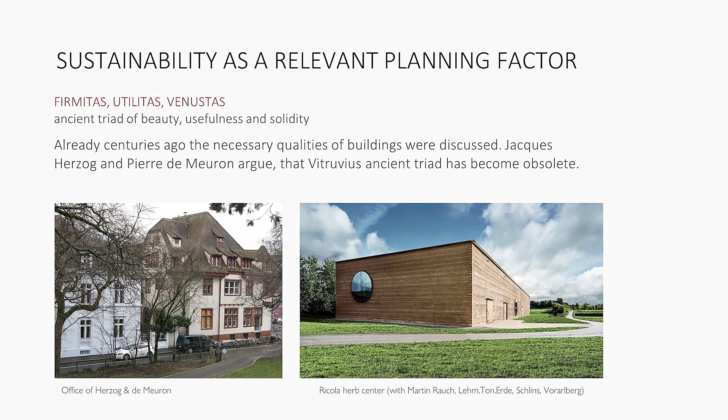Already the Romans discussed the quality of buildings. Vitruvius defined that the triad of beauty, usefulness, and solidity was what defined the quality of buildings. Though they regard it as no more attractive, Herzog and de Meuron admit that firmitas could still play a quite interesting role in modern architecture because it challenges the view on architecture in general. What is a wall? What is a floor?

Here the research of building traditions can help. Herzog and de Meuron researched a lot on old building structures, and they found in the end that beauty enchants us, that beauty makes us curious about ourselves and about life, and stimulates us. Do more, create a biophilic world.

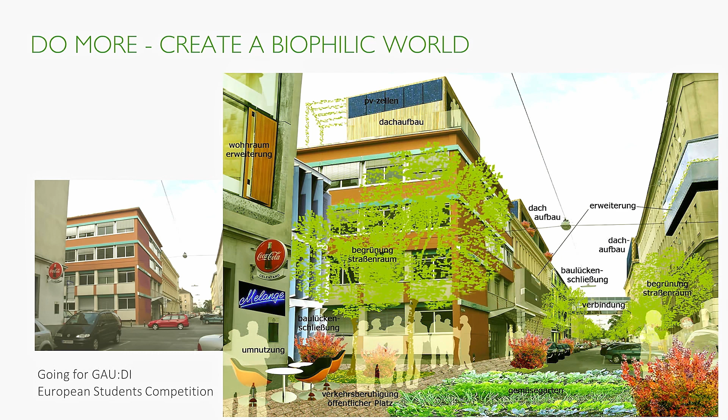We see here that sustainability does not only play a role for individual structures, but also for street life. So it is interesting to also regard these aspects that play a very important role in social contexts.

There's architect Wolfgang Frey, who has set up five principles of biophilic design. He says that ecology, the regard of materials according to their natural properties; economy, affordable planning structures; innovative design; society, integrative places to meet; and sensitive systems that motivate us for new attempts, are the basis for sustainable design.

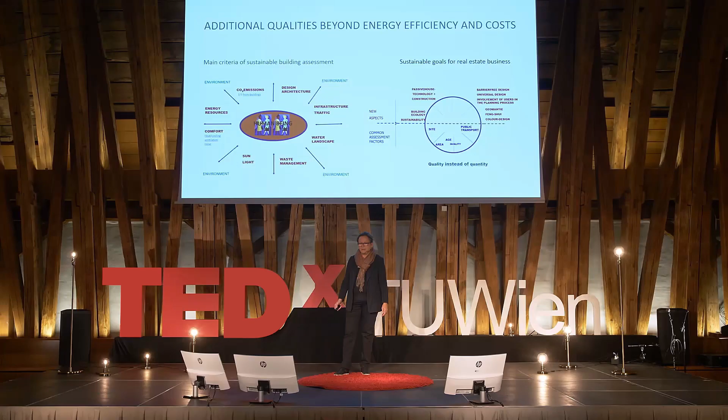When assessing the grade of sustainability of buildings, additional qualities should be taken into account, like comfort and, for instance, design for all, and even feng shui, as shown in these graphs.

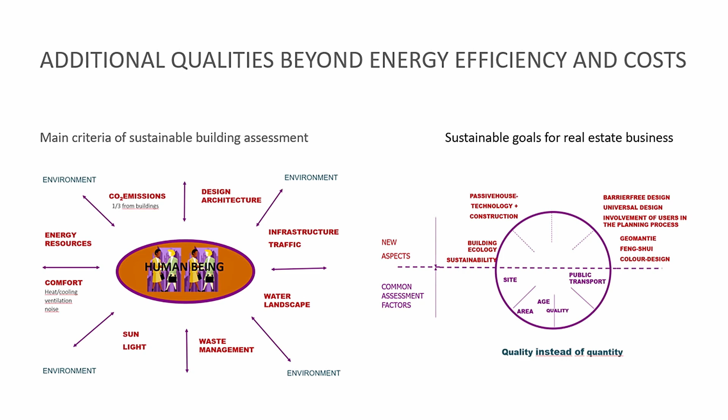Architecture has a big contribution to social stability. Therefore, sustainable planning measures should be promoted, like the Austrian State Award does, or the Swiss Solar Prize, and the Norman Foster Plus Energy Building Prize, which focuses on the integration of PV in the building envelope.

Imagine that you were given a piece of land and you have enough money to build a house. What would you do? How would you build it? If you were an artist, a businessman, an investor, or a father or mother of a newborn child, would you build it like your grandfather? Would you build it like a picture in a magazine? Or would you build it elegantly and impressively, or natural and ecologic?

Would you make it from bricks, concrete, or mud? Alone, or together with friends? And would you use high-tech or low-tech technologies? Well, this depends also much on the place that you have. It is different if it is in the heart of Europe with a moderate climate and solid growth, or if it is in a hot climate in a rapidly growing community, like for instance in Mali.

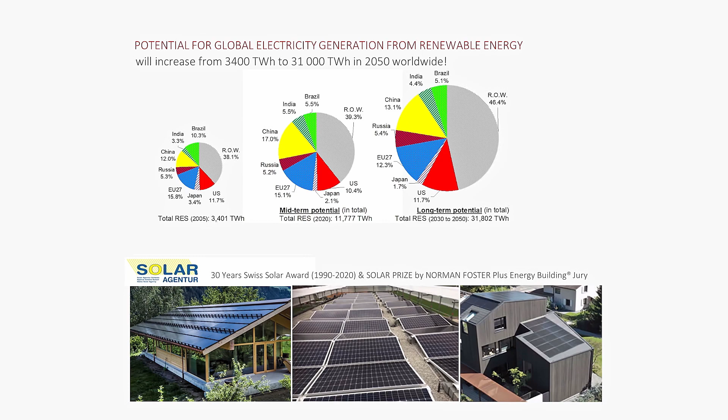Just one slide to show the opportunities of solar power: 31,000 terawatt hours until 2050 more should be enough for a change. It is much more than we actually have from atomic power. Below, you can see the beauty of PV roofs awarded by the Swiss Norman Foster Award. So there's no barrier for using them.

But for the work with students and also for own projects, I set up a catalog of even more new requirements for sustainability, and I would like to highlight some of them. Most important for me, because it's very new and we like to use it very much, is the development of a new vision for the community and its position in the region.

A big picture deriving from regional planning, but very useful. And density, very often discussed: how the new settlements and cities should be dense to spare ground and sites. So the density should be tailor-made for the size of the place, for the size of the buildings of a place. Gardening and food production, very important as an additional source in the built environment.

Planning guidelines from energy-conscious construction: they are everywhere different because the boundary conditions are everywhere different. Regional building materials and crafts, this is new.

They should not be transported and brought from far away, using a combination of massive support constructions and fill-in elements from renewable materials. Social considerations play a very important role. Watching the elections at the moment, we see that it's very important to find connecting solutions.

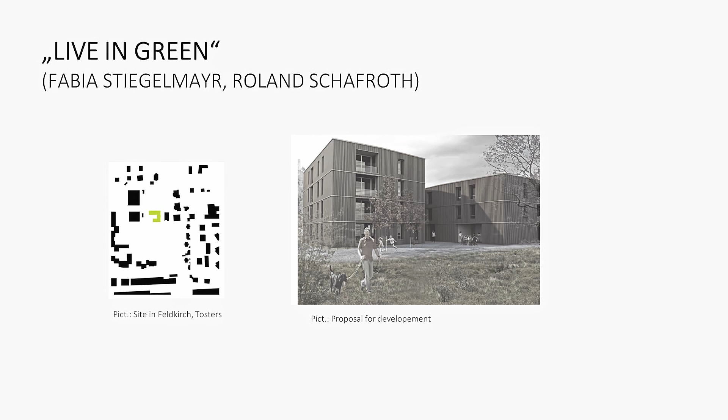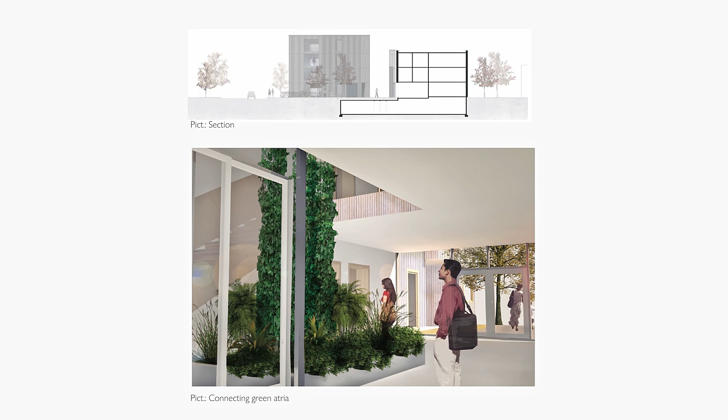Also in the interior there was green integrated into the design, which is always very, very attractive. Another project done for immigrants and for the use of empty spaces and buildings in the center of towns.

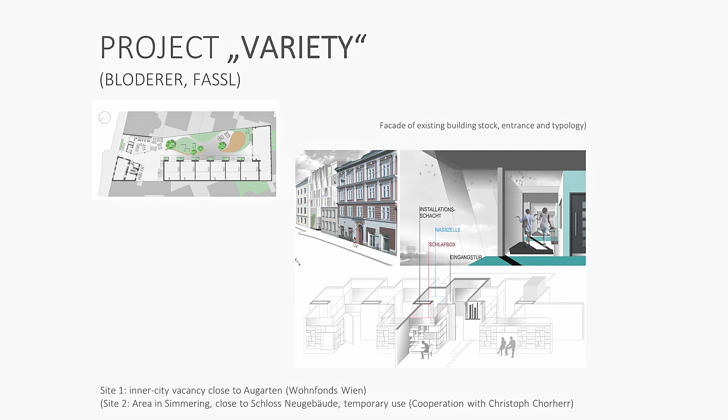This project shows how a small gap and a small site can be used in a dense area to offer a good life there. The old building offered an exceptional height of the rooms, and so three-dimensional structures could be introduced, very charming and very well suiting for young people.

This was a project for new neighborhoods on the Nordbahnhof area. A new living concept should be developed with innovative technologies and connected to DIY construction. In the end, it should be a livable and animated neighborhood.

This is the plan that formed the basis of the course. It was the winning project of an urban planning competition, and it shows very well that they overtook the Viennese block structure of the town.

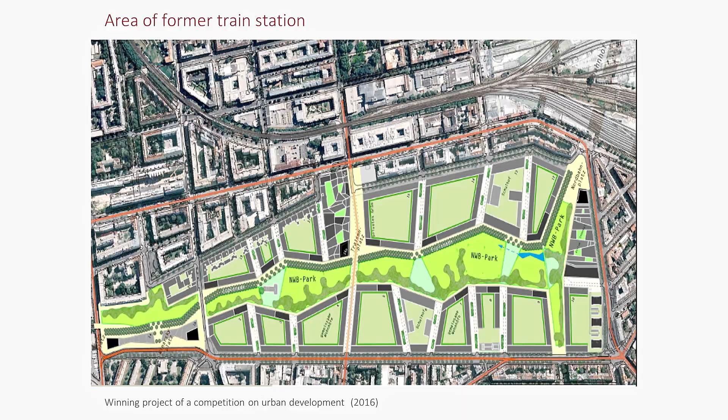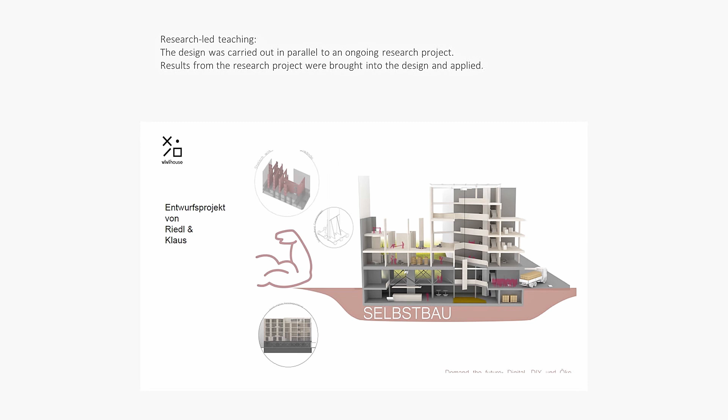This project, which I like very much, shows flexible room structures - room shelves with skeleton construction as a primary construction, with prefabricated wooden building elements as a secondary construction that can be easily changed. A concrete storage technology in the ceilings, and an energy efficient envelope combined with integrated renewable energy sources. This was also very interesting input.

Parts of the building volume were left empty to be filled in later when needed. So a very sustainable topic.

A businessman from Karlstein came to me and asked me to develop ideas not only for the site he had in Karlstein, but also to improve the life there. Karlstein is a community north of Vienna, close to the Czech border.

The following requirements were taken from our catalog to be followed by the students: the development of a vision, a big picture for the whole community; then the density chosen, tailor-made for the size of Karlstein; gardening planning guidelines were developed; regional building materials, which is also wood in that area; and specifically home offices, because many people go to Vienna for work.

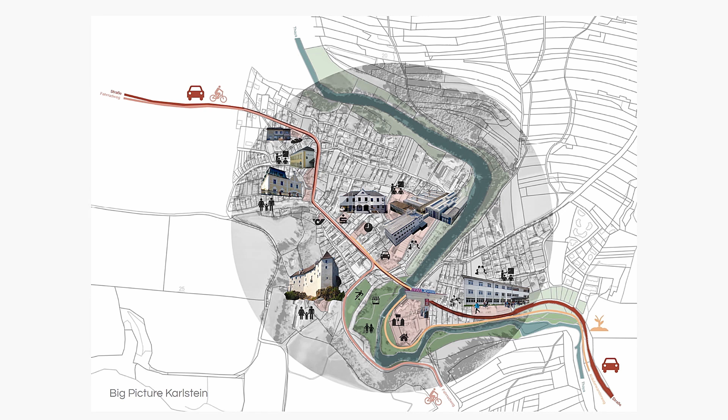This is an example of a big picture. It shows that the community should be developed into a community of short ways and cyclists. Most important, interestingly, was to change the main street into a boulevard where people can walk and meet.

Kirchberg has been a touristic destination for Viennese since long, but lost its attractivity. Also here, a vision had to be developed as a first step.

The main focus here was the recovery of the old stock, the revitalization of the old town center, to lead the discussion between living in the town center versus space consumption in the undeveloped area, and the conservation of green spaces that were available in the center.

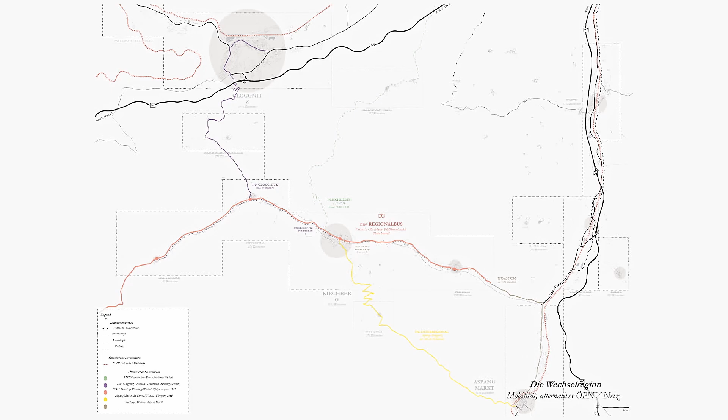This shows the position of Kirchberg in the region. Its disadvantage is that it's far away from the main traffic routes. That's how you can visualize analysis of landscape, infrastructure and mobility.

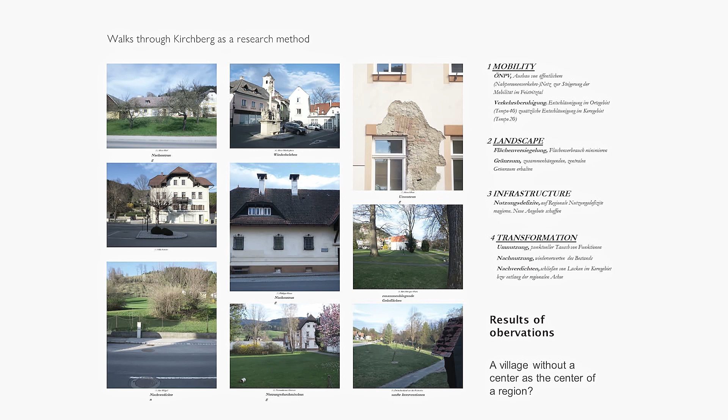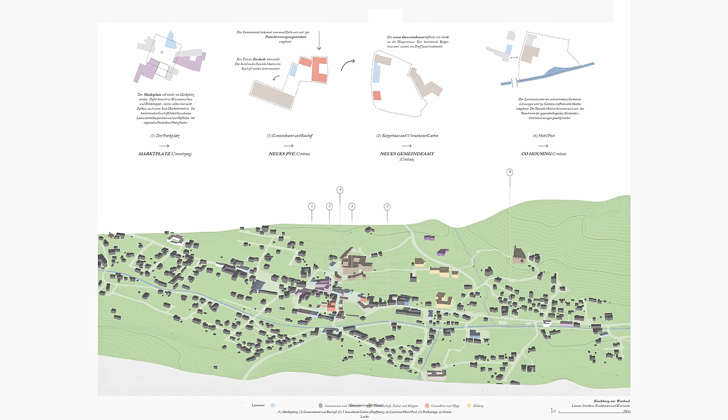Walks are a very good research method to learn the specifics of a village. Furthermore, it was important to find out which buildings and which places are important to be kept and developed in Kirchberg, and also how mobility could work if organized a different way, and to discover good meeting zones.

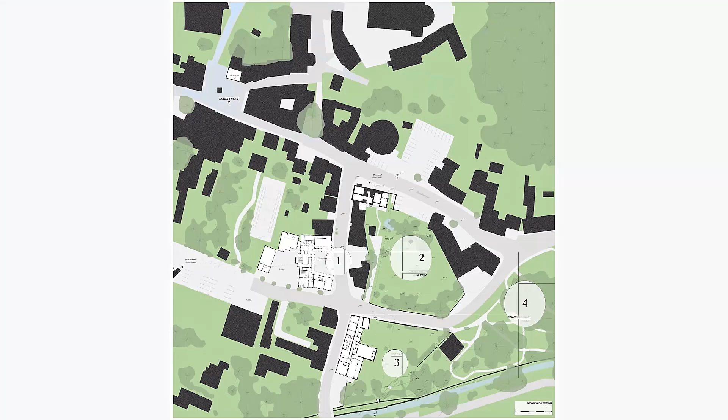This was the end. As a result, the center was reorganized, and the existing building stock was renewed and also reused, with some uses changed from one building to another. So the community was very much okay with it.

Coming to sustainable refurbishment, a very interesting example was the Otto Wagner Areal. Imagine it is younger than this beautiful hall here, much younger. So we're very happy to have this hall as a place to perform our talks.

The historic buildings of this former hospital were to be adapted for future use, which will house the Central European University, the CEU, as they move from Budapest to Vienna. Careful planning was required: which technologies are suitable for these old buildings, the integral and simultaneous use of planning tools, and strategies for mastering the complex construction tasks.

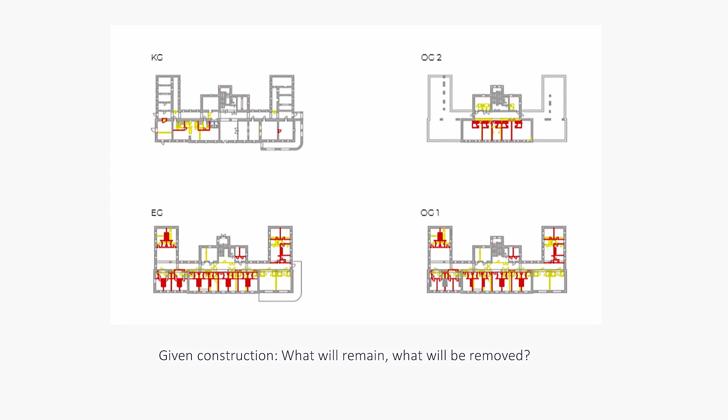Then reflect on how the pavilions could be reused, what will remain of the structure, what will be removed, what could be changed courageously, and how to use the given construction. The last step was the refurbishment of the exterior area to make it an attractive place for students, teachers, and the public.

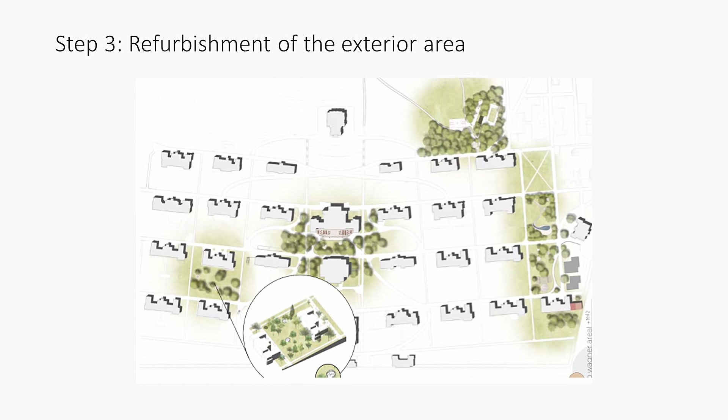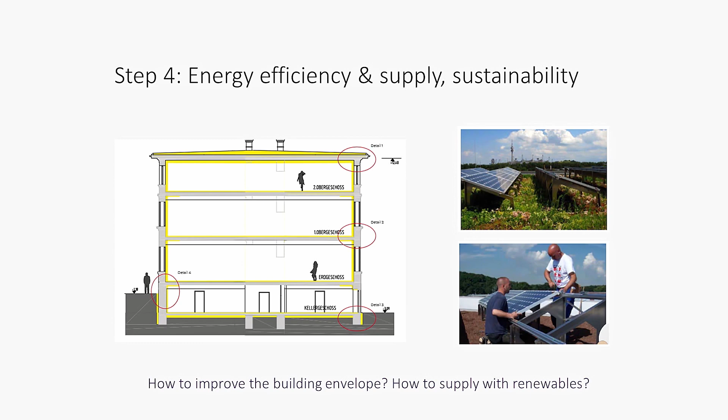Last step, energy efficiency and supply. New technologies like interior insulation by silicate panels, vacuum insulation on the roof, exterior insulation on the bottom, controlled ventilation, PV, and earth collectors. Of course this also has to be communicated, as is done here with transparent PV on the facade, and insulation at the bottom of the facade.

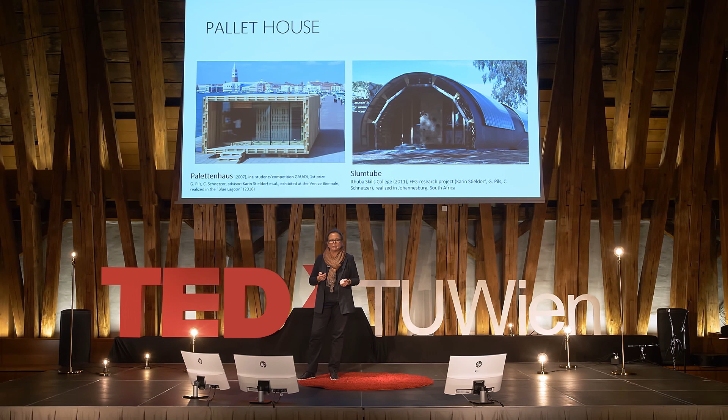Now, a small series of tiny houses built from wood and renewables, developed and built together with students. The first one is the pallet house, built from pallets which are normally either thrown away or burned. It is a nearly zero energy building, shown at the Biennale in Venice and also at the Center of Architecture in Vienna.

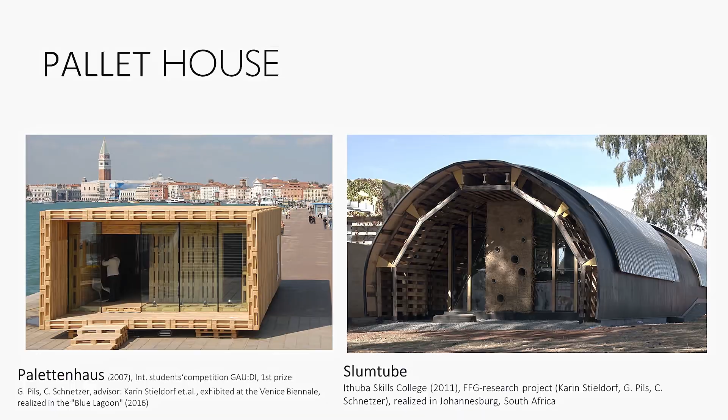A second one had been built in South Africa for the Ithuba Skills College, nearly all done with waste material. Another one is the Lisi House, built for the Solar Decathlon, which was a winner project because of the connection of excellent design, innovative technologies, and ecology.

It is a plus energy home run totally by solar energy, nearly entirely built—95%—from wood.

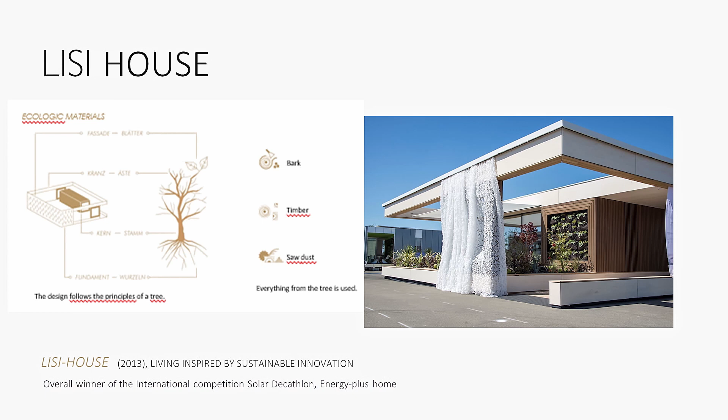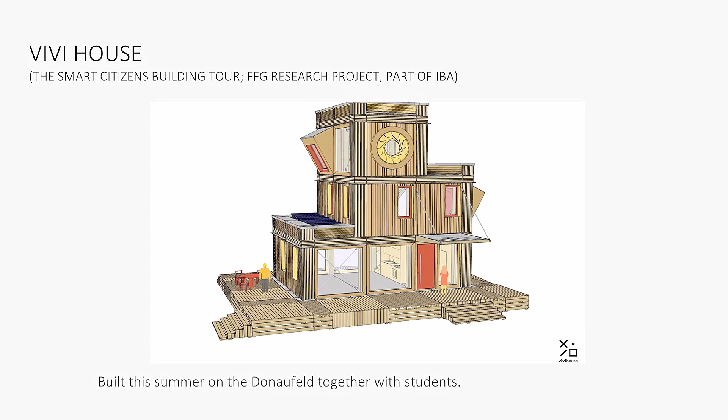Vivi House is the official project of the International Building Exhibition in Vienna at the moment, the IBA, built from prefab modules. A new system was developed within a research project, easy to mount, demount, and rebuild. It was built with students, as you can see, at Vienna University of Technology, using straw and clay for the plaster, also in passive house standard.

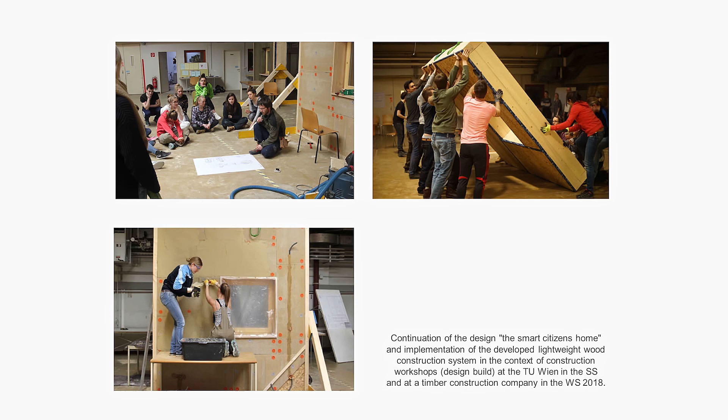This will be the next step: going for larger buildings for mixed use regarding elements of sustainability and working primarily with renewables. An excellent building standard, construction, and execution is a matter of fact, of course, in order to limit climate change and guarantee comfort and a good life.

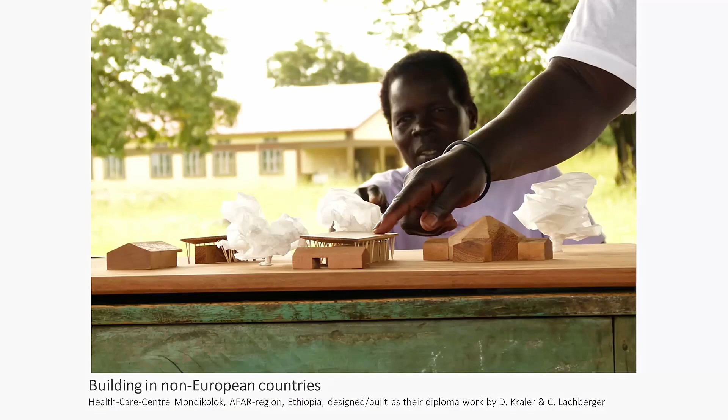This last project shows how to proceed in developing countries with low-tech technologies, using wood, straw, clay, and the future users' helping hands. This is a healthcare center in Mondikolok in the Afar region in Ethiopia.

Making unburned bricks from earth, building together a simple roof construction from wood available there, covering the wall with mud plaster, and offering a good time under a big shadowing roof without needing cooling facilities, saving the energy that would have been needed for them.

Here, our journey ends, saying that sustainable architecture can contribute much to a good life and a bright future on Earth. I do hope that many more people will go for sustainable architecture in the future. Thank you for being with me today.